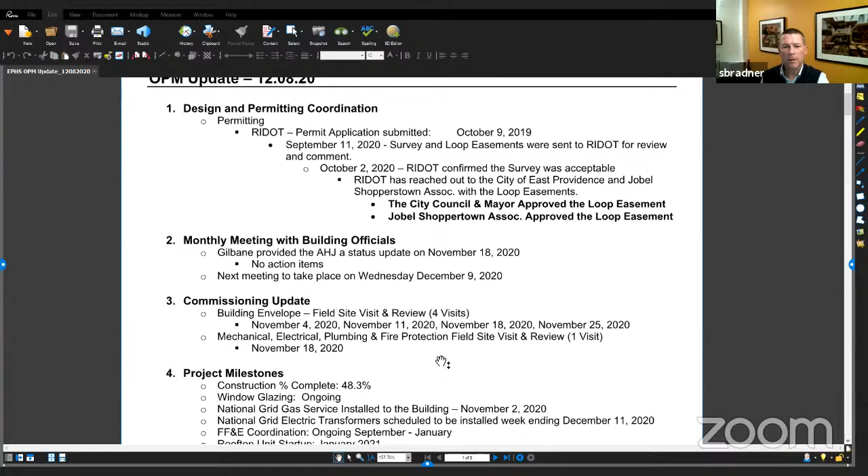Project milestones - we talked about this last month to get a better sense of the actual completion to date. This number reflects the work in place, including retainage, so we're at about 48, just over 48%. The ongoing activities: window glazing - if folks have been out there over the last week or two, they've seen an extensive amount of the curtain walls going up. Those are the much more monumental glazing going up on the corners of the stairwells. So you're really starting to see the building enclosure coming into its final form.

Key steps with National Grid: we had the gas installed just before our meeting last month, and we are installing transformers next week. That's a big deal to flip us over to permanent power. I believe what we are currently slating is by January to be ready to flip that over once National Grid has set the transformers, which is a key milestone, and then the electrician doing the final runs from those transformers into the building for those full connections. So that's a pretty big overall project milestone.

FF&E coordination—there's been a lot of activity over the last several months, and that's ongoing, including samples that have been placed in the gymnasium. We've had a lot of interactive discussions with AI3, with our furniture consultants, with members of this committee, and members of the school faculty and leadership team. It's been a pretty dynamic discussion, and I think we're honing in on that final sample set of everything we're going to need from a design standard standpoint.

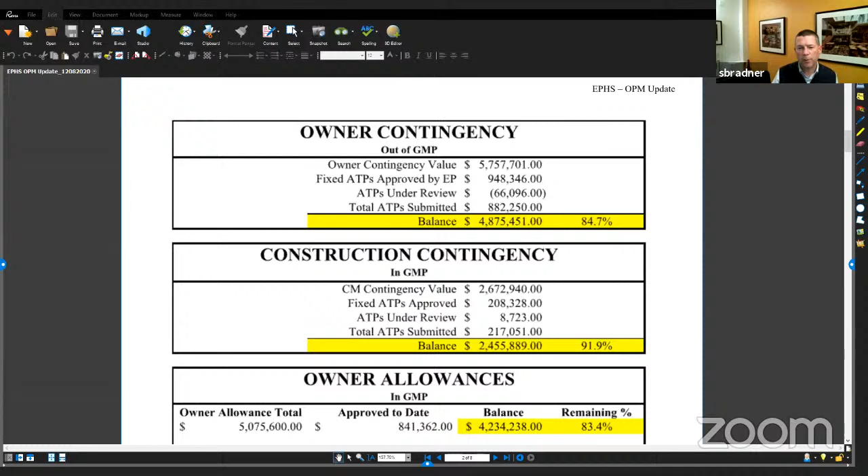From a financial standpoint—Sam, excuse me? Yep. Can I just go back to project milestones for a second? Sure, yep. With the rooftop unit startup next month, will we be getting off temporary heat in January?

I don't know that to be the case, Gene. Let me confirm that—I don't have Eric with me tonight, but I don't know if we're going to immediately flip off the temp heat. Yeah, that's a question I'd like to know—if we're going to heat part of the building with the rooftop units and part with temporary heat, or how that's going to work.

Gene, it's certainly not going to end immediately. Anything we can leverage the permanent system for, we'll want to, because it gives us better heat distribution. But I think it would be premature to expect that once we energize it, we'll be able to do a flip. And the other thing too is startup doesn't mean commissioned and completely ready to go either—there's that complete commissioning process that's going to happen with those units as well.

So if for next month's meeting we could know when we're getting off temp heat, that'd be great. Yeah, I think in the big picture, we're probably going to use it all winter. Bill, I don't know if that's a fair assumption, but I'd assume there's going to be portions of the building that will. But you can't do the millwork without some type of heat, so...

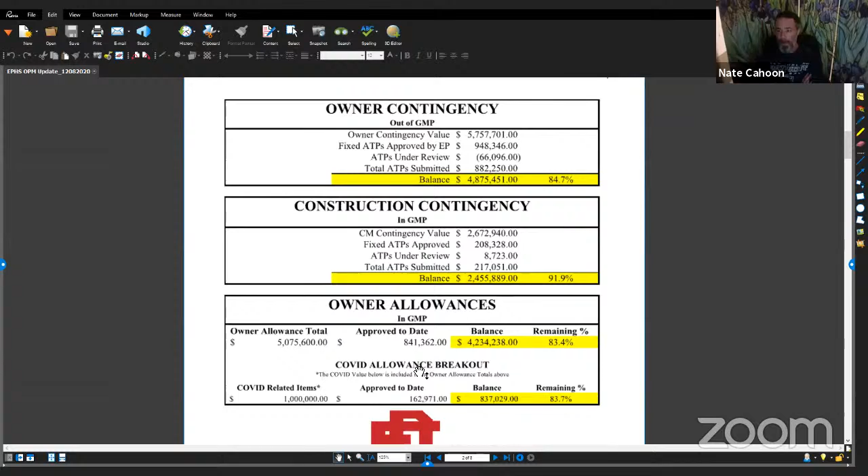Sorry Nate, I was just going to add a comment, certainly not to contradict anything Sam said. Everything he reported was completely correct.

No, not at all, but just to further your point and Kathy's point too, regarding the progression of these COVID cases: as of Friday we had 3 positives, as of today we have 7. We currently have 17 people on the project in quarantine. So to Sam's point, it's changed very rapidly, and I think we all know the trajectory we're very likely on.

And the building is getting enclosed, so I think it's putting the workforce in the building at greater risk too. But we haven't had any on-site transmission that we've been able to determine through tracing, and we are doing all of the contact tracing ourselves.

Thank you, Bill, for the further explanation.

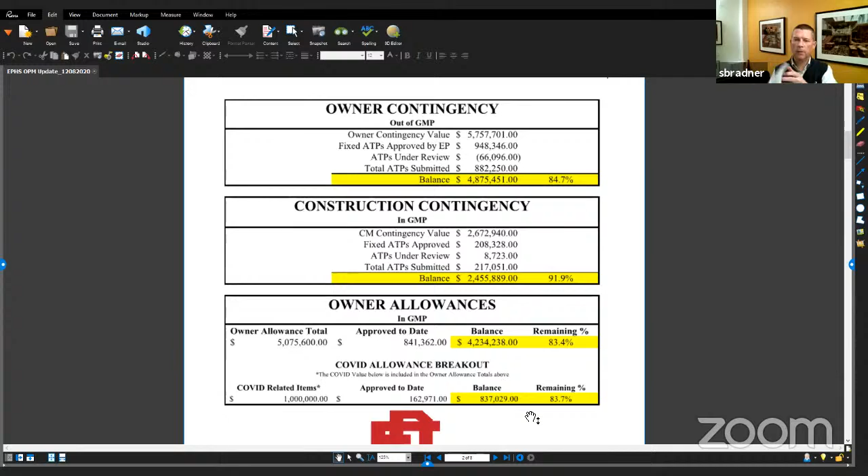Just a financial snapshot of where we stand today on contingency, construction contingency and allowance. With the projected ATPs, contingency is about another 3% drawn down since last month. We're about just under 4% of construction contingency utilization in the last month. And our owner allowances, we've used another 5.7%.

The COVID allowance breakout remains at the same number it was last month. Gilbane is continuing to track these costs, but we're not necessarily seeing a hit every month against the allowance—part of that is just timing of paperwork—but those costs continue to be put against that allowance, and we continue to review them on a regular basis with Bill and the rest of the team.

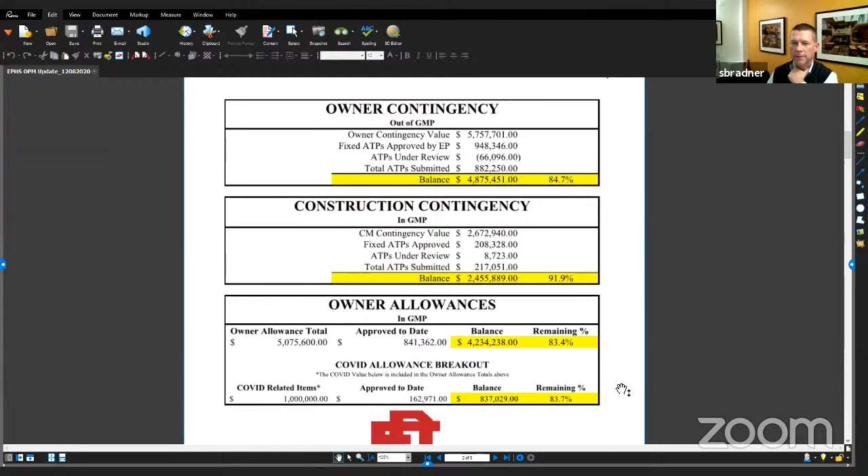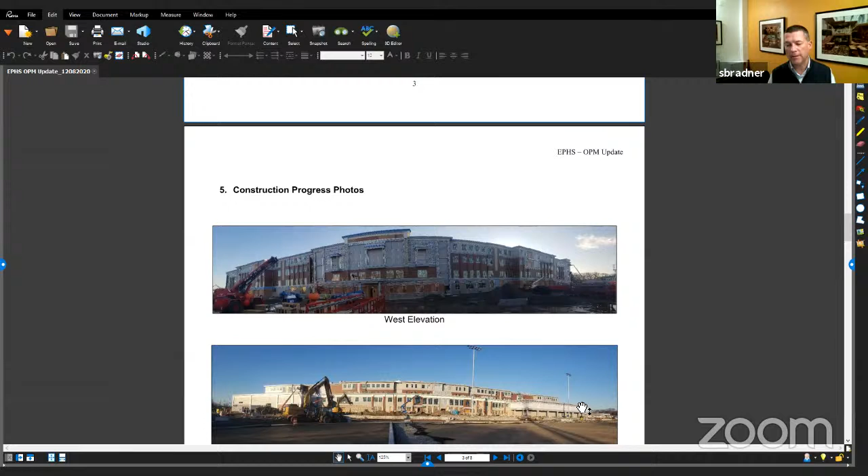The look ahead—again I'll use the pictures to talk through where we are. In November we had 17 subcontractor teams on site, 230 workers per day, and just shy of 1,850 man hours per day for that month. Similar to the last few months, we're seeing a full complement of all the trades.

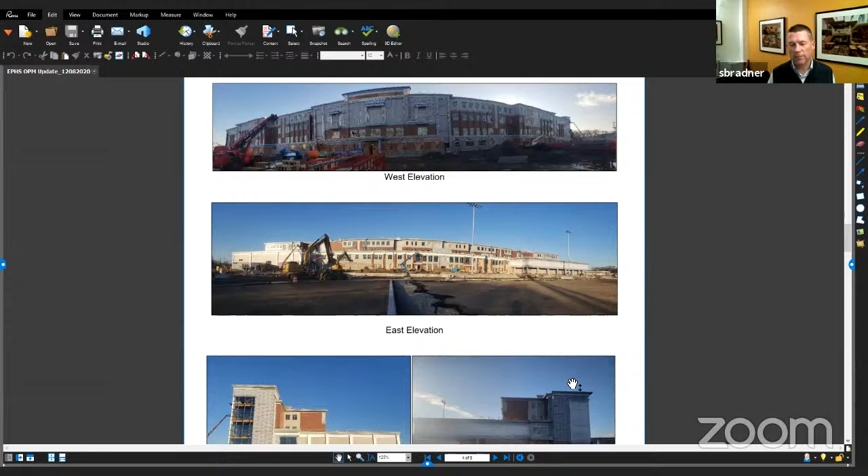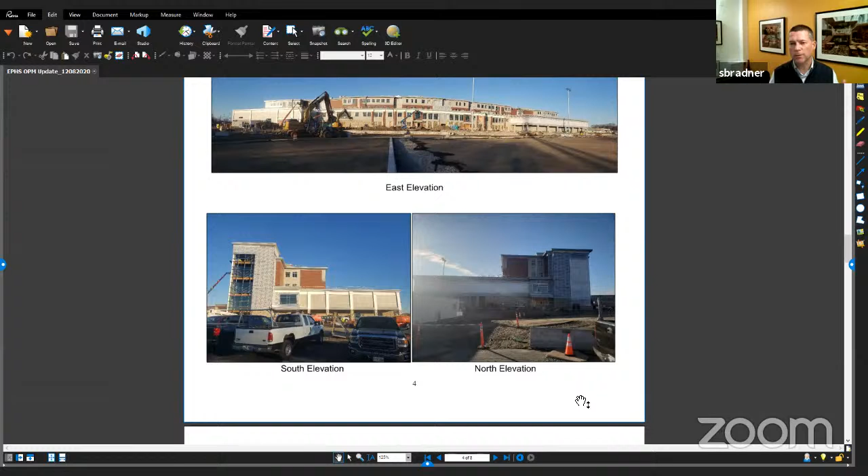From site working their way in, still ongoing major earthwork and paving. There was a significant amount of asphalt introduced to the site over the last month. They continue to work on the track at the stadium.

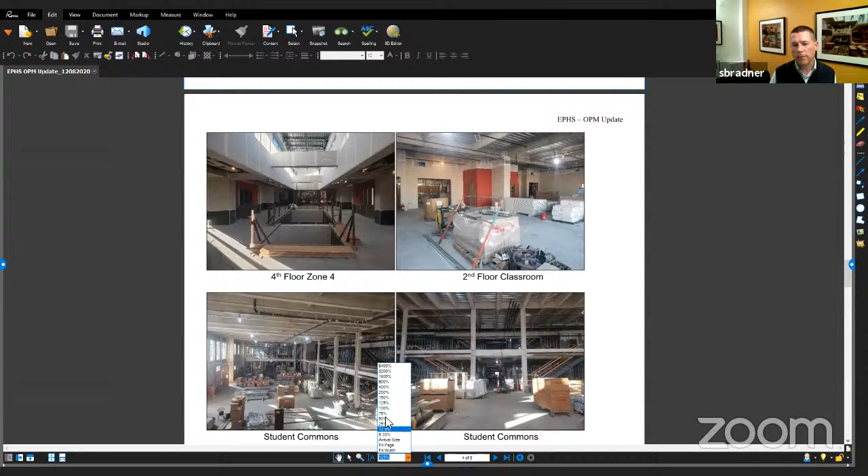As we come to the envelope, as I mentioned before, we have continuous work happening around it with installation of curtain walls. Really the windows are just about complete, and we're getting into that closing sequence of a lot of the exterior siding and envelope components.

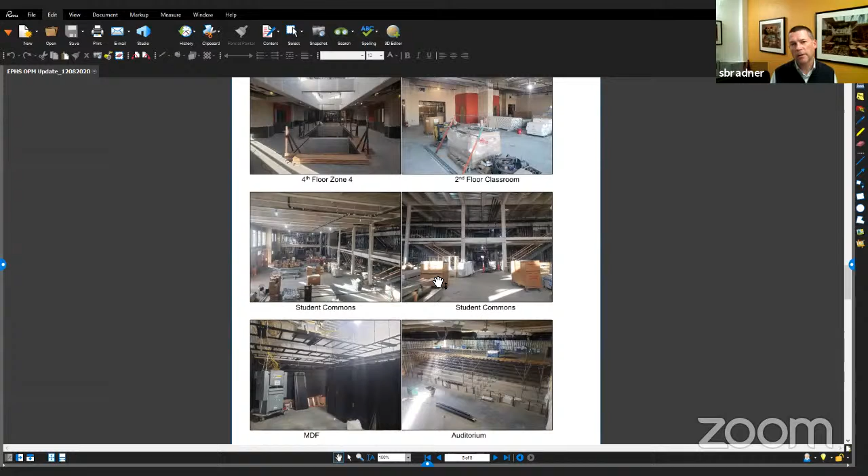Interior, we're seeing a tremendous amount of progress from south to north and top to bottom in all the classroom wings on 3 and 4. Really starting to see some of these common spaces come together—here are two photos of the student common space. Again, wide open now; this will all start to become enclosed, but it gives you a sense of the volume of that space.

Another great one is the auditorium. Although you have decking in here for some of the work happening up in the ceiling, the space and volume of that room is very apparent as you walk in there.

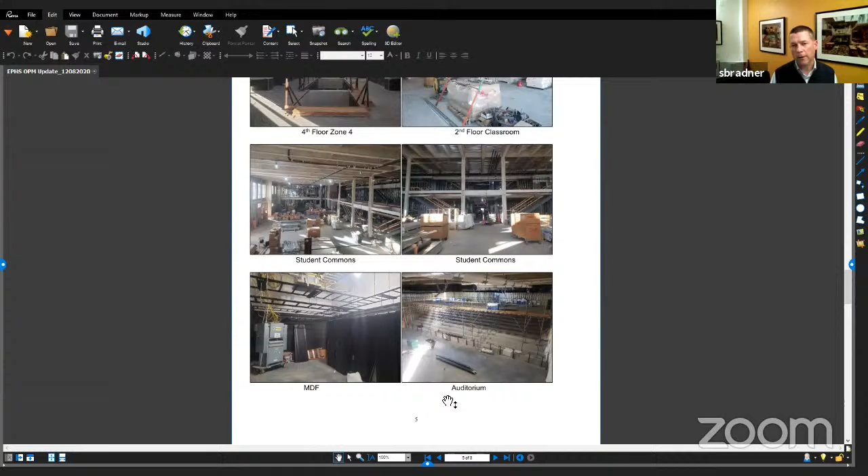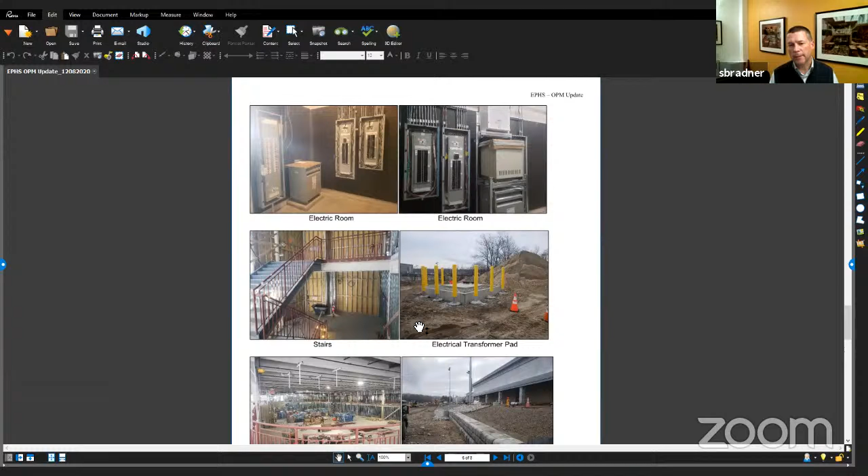Some of the less exciting but equally important stuff is the introduction of the tel data—so you have your MDF room and IDF rooms coming online. Major work on the electrical, especially in preparation for the transformers landing on site next week. Stairs, misc metal work around those stairs, and some of the open two-story spaces.

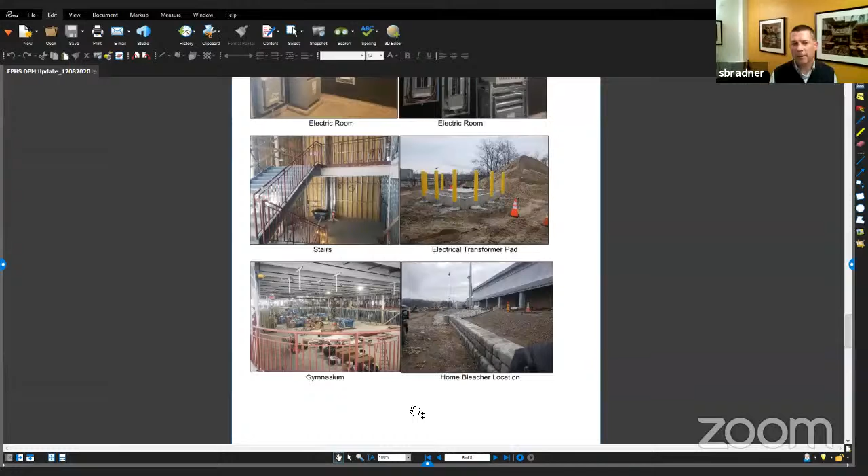And then just some of the work out on the site itself. For folks, I know we've had a couple tours over the last 2 to 3 weeks—really the space just continues to change; if you take 2 weeks off, a lot happens out there. So I continue to encourage folks to get out there when they can to really see how that space is developing and how everything's coming together.

We've got a workforce that's increasingly more vulnerable, impacted, and certainly critical to keeping us on track. Do we want to take a look at maybe cutting the tours or holding the tours at bay until we feel more comfortable where this is going?

Or you could do them at a little bit different times too, Nate, if we're trying to prevent any exposure. But that's very much up to the building committee. I don't want to promote any bad decision making by any means.

Would there be times, Sam, where, as you mentioned, it'd be less workforce out there, it'd be appropriate for tours, like getting closer to the holiday? Yeah, I think in general, Bob, after 3 or 3:30 is when we see most of the trades cleared out based on their work day and hours.

That is also, obviously, daylight's diminishing at that point. But I think that would limit or eliminate any of that kind of crossover between a tour and the trades people that are out there on a daily basis.

I haven't been out there for about a month and a half, and I'd love to get out there again, but Nate is correct, we should minimize our interaction with the trades as much as possible. So if you could let me or other people on the building committee know when a good appropriate time would be for the next tour, that'd be nice.

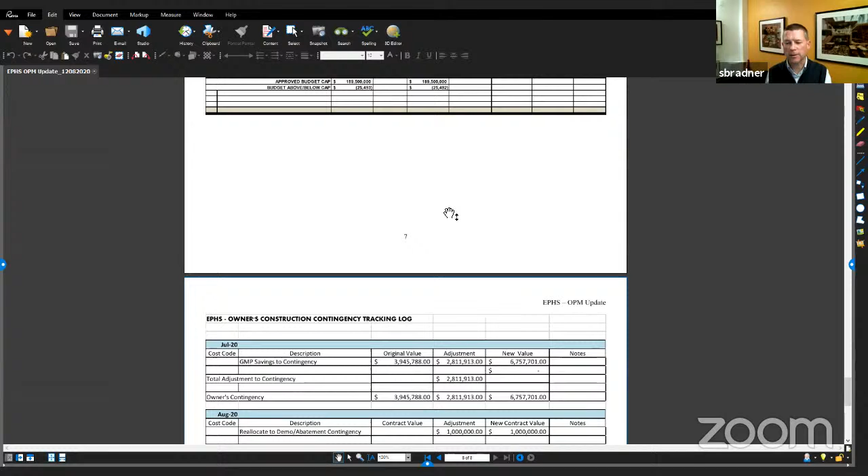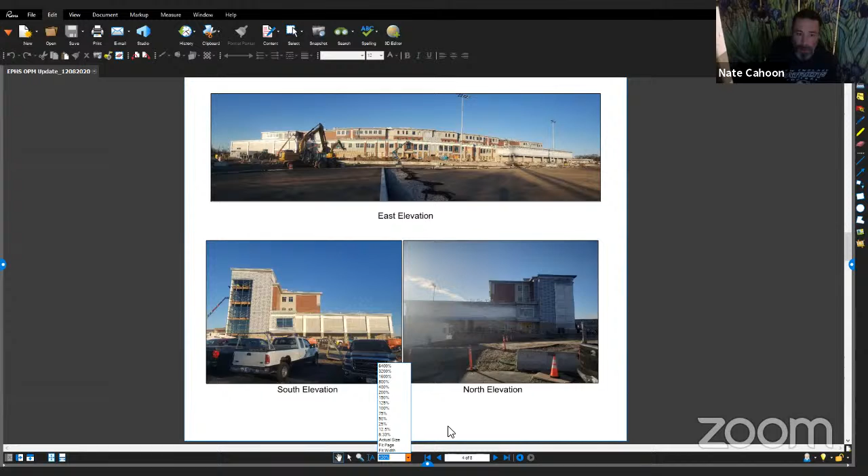So happy to answer any questions. I know Justin's waiting in the wings for the next conversation, but whatever the committee has for us, we're happy to answer. Just quickly, do we feel like we're on track? I know, Sam, you mentioned the various sessions that have been going on for FF&E. Do we feel like we're on track for the contracting portion of that enterprise, if you will?

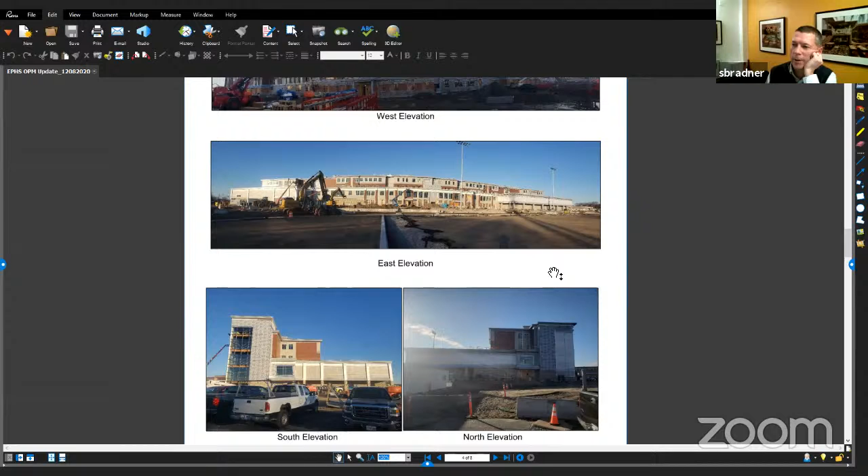Yeah, I think we're crunching a lot of work into December and January to get ready for that bid package. So, and Justin can weigh in too, I know Justin's on the call. I think we are on track. We're making some adjustments this month with some of the sample furniture that came out, so we quickly have to make that turn and get that back, and get the documents correct, make sure that we've got the right basis of design information in there so that we can get everything ready. Justin, I don't know if you have any comments on that from a schedule standpoint.

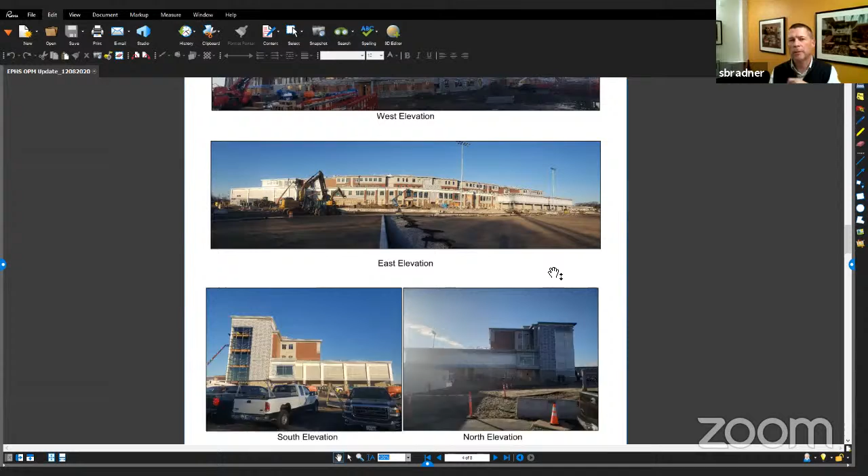As far as schedule goes, we're still on track to go out to bid roughly in January for FF&E, and that will give us an install date of July or August, basically before students are in. So we're still on track for schedule, and we're just wrapping up the loose ends.

Do we have any information, Justin or Sam or Bill or anybody, about limitations on materials and availability of certain types of items? I imagine that's probably going to be a decision point for us when it becomes time to award that bid, just because we think something is the ideal thing for the building. If it's delayed by 6, 7, 8 months or something, then we might have to shift gears.

We actually had this conversation quite a while ago with our consultants for both furniture and equipment, and they have seen an uptick in time, but not significantly. And that uptick is actually included in that schedule. So we do have a little bit of a buffer in there for COVID, or any of those delays. As long as we don't get surprised by any of it, we should be good, but there is a little bit of buffer in there.

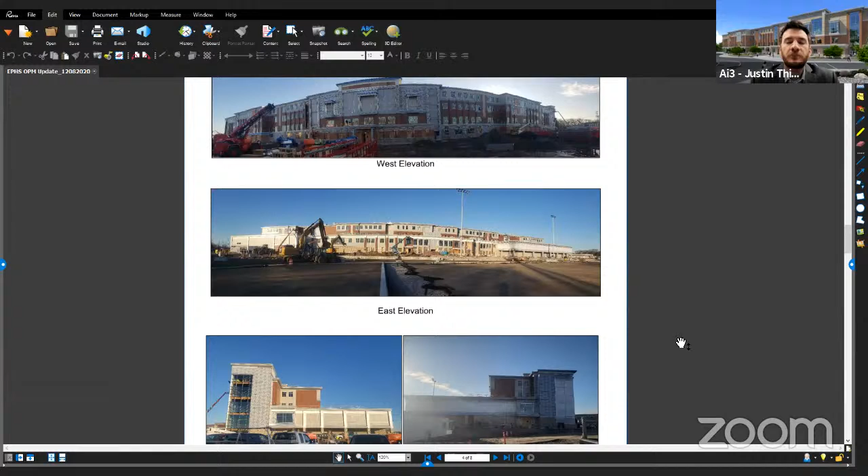Jim mentioned it when we talked about FF&E several months ago, 4 or 5 months ago. I just want us to continue to keep an eye on it, because it'd be a shame for everything else to fall into place, but for this not to be put into place. And that's the thing that kills us, if you know what I mean.

Understood. Nate, on the construction side, we've had the good fortune of not experiencing any significant issues other than what we incurred in the very beginning. So I'm cautiously optimistic that we've got pretty good control of everything right now. We certainly are not aware of issues. I would be more concerned about materials that aren't yet fabricated and what the consequences may be.

Of events over December, January, and how that might impact manufacturing down the line. That's what's going to have to be monitored.

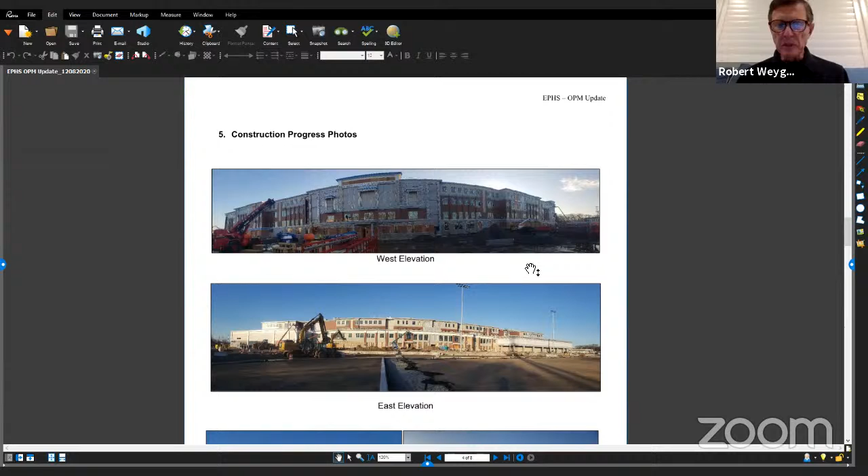Justin, I had another question about the FF&E, if I could. Nate raises a great question. By that January meeting—I'm not sure what the date is—would we be able to get a sense from you of anything that may have changed, whether that buffer zone may be used up a little bit, or whether it's on target? In other words, just give us a status update in our January meeting of where you are with FF&E.

Yeah, we can definitely do that. I just made note of it. I'm in constant contact with our consultants, and I will make it a point tomorrow to touch base and see if they've heard anything new regarding delays or anything like that. But we can definitely give you an update in the January meeting.

Thank you. Yep. And Nate, back to one of your original questions, I think the other thing will be that schedule will be part of the bid that goes out on the street. So let's just say there was a specific type of chair we were looking for, but the vendor came back and said it's a 16-week fab and then another 10 weeks to deliver. Then we're going to be able to have that analysis, and when Justin and the team do their bid leveling, they'll be able to take that into consideration.

And that may be a pivot point where we say, okay, this is what we wanted to do, but there's an 'or equal' that we're willing to go with that doesn't have time constraints. Does the ownership team want to do that? So that'll be part of that dynamic evaluation of the bids as well.

Okay, I guess last question on this, not to beat this to death, but just encourage everybody to cast a wide enough net on there. Maybe reach out to sources you wouldn't always be inclined to solicit, just because there might be somebody out there with some magic dust that can pull off something that one of your typicals can't.

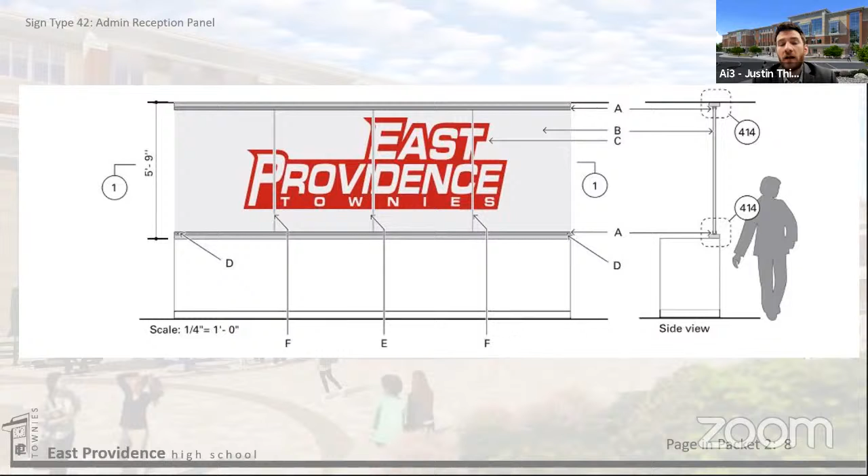Moving into the main focal point of the building, this is a handful of signs right outside Student Commons. It's right at the main intersection of the main entry and the main corridor. So this is visible for all the students, visible for all the public who enter. It's the center hub of the building.

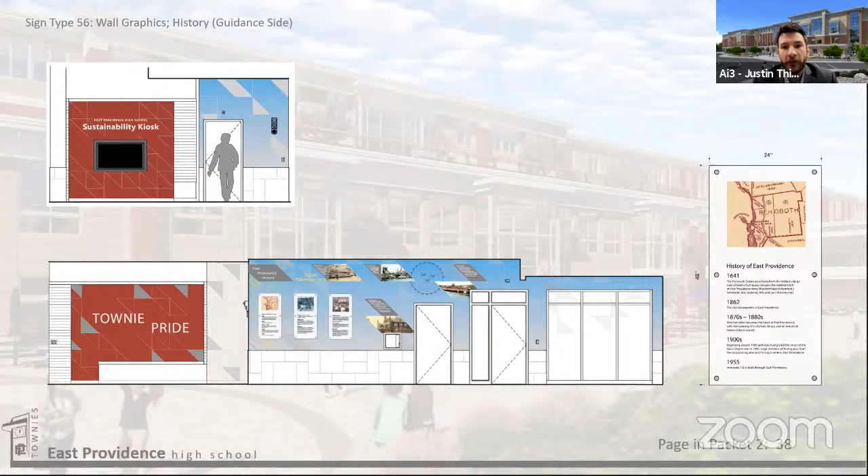Following around the corner, it turns blue, and on the bottom part where it's a little longer, this is the first part of the history aspect of the project. There's two of these. This first one is of the city, with some facts about the city, and the triangles are the unifying element throughout. There's also images of town, some dates, and important facts of the city.

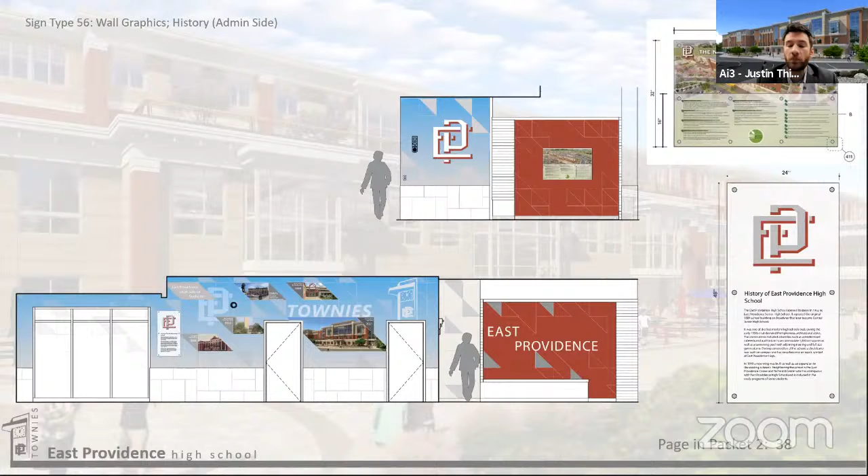This is a 3D element, and you can see how they sort of wrap on both sides, through the main corridor right in front that's out to the main entry. So as you can imagine, people walking through are flanked on each side with your Townie red, the sustainable elements, and then they can transition to the history items within the building.

Throughout the project, we have inspirational quotes and words, as well as East Providence logos. For instance, the one on the left, the EP, that one is actually on the main level between the student commons and the athletic wing. So if there were any occupants walking back and forth, whether students or public, they would be able to see this.

And then there's some other instances for graphics and text throughout. For instance, this one: be strong, be brave, be humble, and strive for greatness. These are located throughout the building.

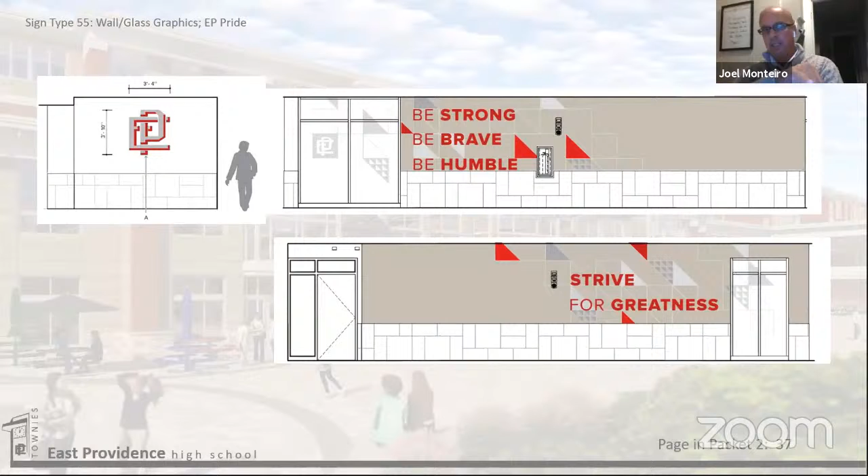On that one, wasn't that the one we spoke about, that we learned that the EP is more three-dimensional? Yes, correct. Most of these are vinyl graphics, like be strong, be brave, be humble - it's printed and then rolled out and adhered to the wall. The EP is actually a 3D graphic. Think of it as a thick acrylic that's back painted and then mounted to the wall. So there is a 3D element to it, and it's not just vinyl cut around the logo. So yes, that is correct.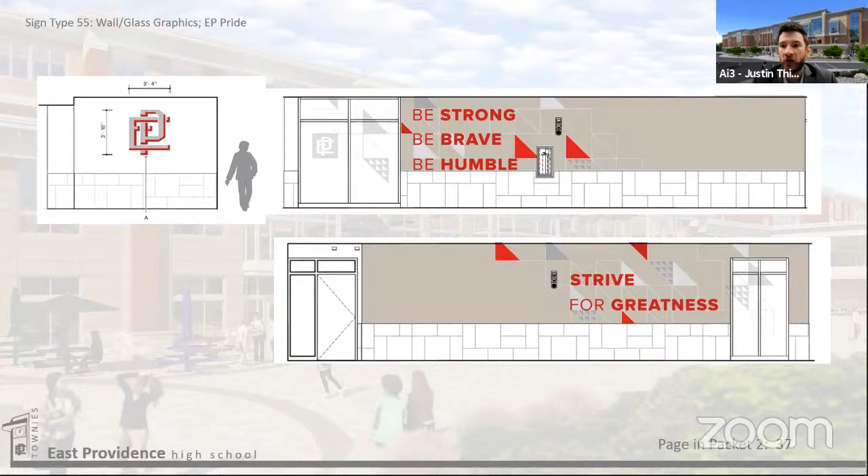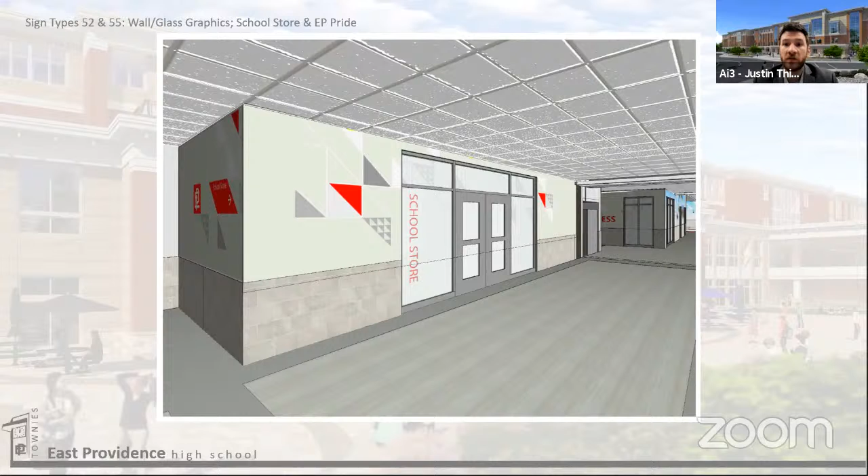Just another example of the triangle wayfinding element here, noting school store and how it applies to the glass as well. You can see it in action here, how it transitions around a corner, really creates movement and excitement, as well as the wayfinding opportunity for this sign.

Here's an example of the metal letters within the building. Spaces that are identified as dedicated have these letters - they're adhered to either glass or to the wall. For instance, Media Center and the band room are on glass. The auditorium is on the wall directly above the doors.

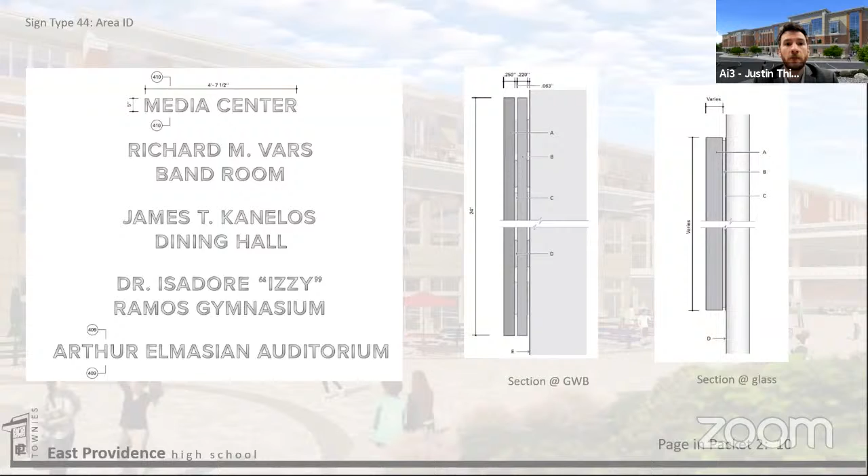This is an example of the student commons. Student commons is a really large space, so we were looking for ways to make it lively and also provide some inspirational words. We find these large inspirational words very helpful, and we've had really good positive reviews with this stuff - it creates a sense of community within it. So here in Student Commons it's collaborate, innovate, respect, and connect. And you can see how the towny red, as well as the tones of gray, are tied in.

Additionally, we have recycle stations throughout.

I mentioned the CHPS requirements for the green kiosk. We also have recycle station requirements. To highlight these, every recycle station has graphic signage over it to promote recycling, reduce waste in the landfill, and push that concept forward.

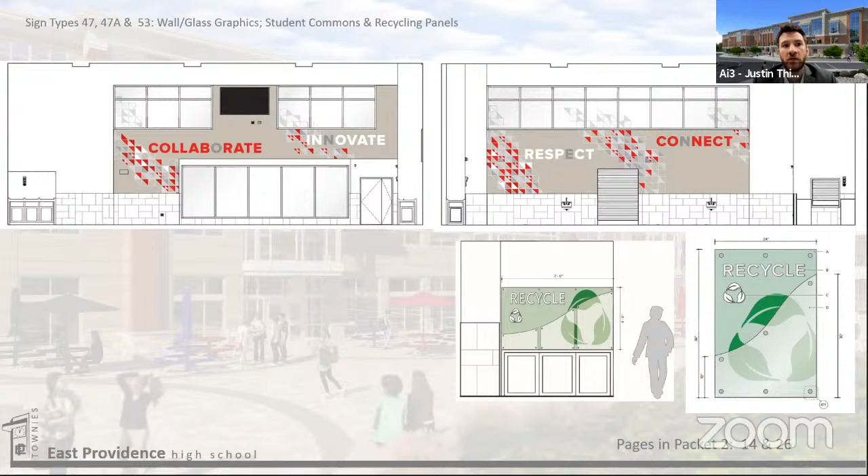Hey Justin, are you comfortable enough to say that wherever there's graphics in red, it's towny red? Yes. And some of the images like this one show it right on the screen. Obviously it's the computer rendering, so it's slightly off, but it will all be towny red.

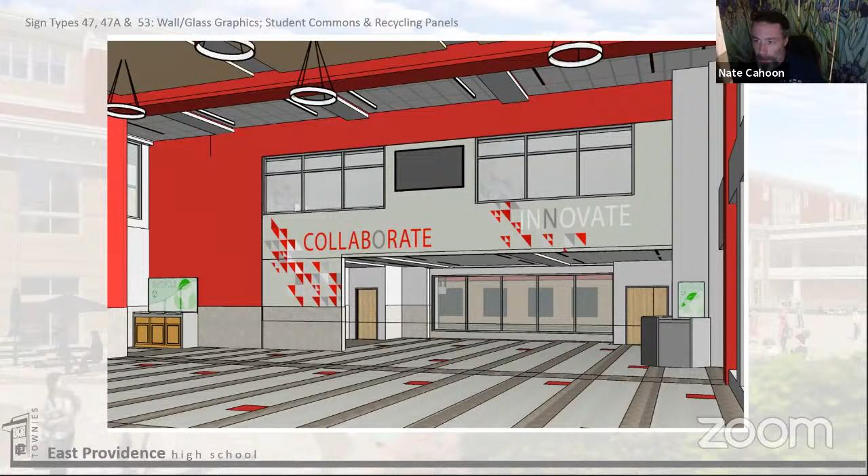I think that's what everyone prefers, but the issue we've had with towny red in the past is it eventually fades into a chewed bubblegum pinkish gray. What are we looking at here in terms of longevity?

These are all high quality paints, and it's also high quality printing on the vinyl. The fade on these is minimal. Additionally, if there's any direct glare, daylighting is actually a huge part of CHPS, so there are ways of reducing direct glare and daylighting, which is the cause of fading to bubblegum pink. So the building itself should address most of the fading concerns.

If you look at the exposed steel on the addition at the high school, that faded into LaSalle maroon. I just don't want that to happen again. Makes sense. On the exterior, it's primarily aluminum letters.

Even some of the vinyl at the walking track, the Big East Providence sign, that's actually a gray or white. I can't remember exactly, but it's not towny red, so it won't have a chance of fading.

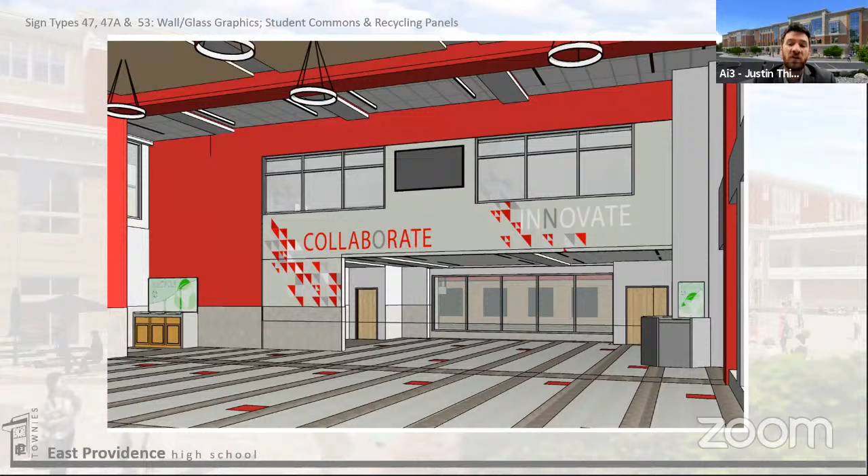We also have some signs that are program specific. For instance, we have engineering and visual arts right here, located in the center of the building, basically right behind the space. You'll actually see these walking down the hall, visible at the end of the hall, drawing excitement and wonderment, making people want to see what's down there. Engineering is represented more technically with mathematical straight lines, while visual art is more organic and free-form graphics. These are both on the second floor.

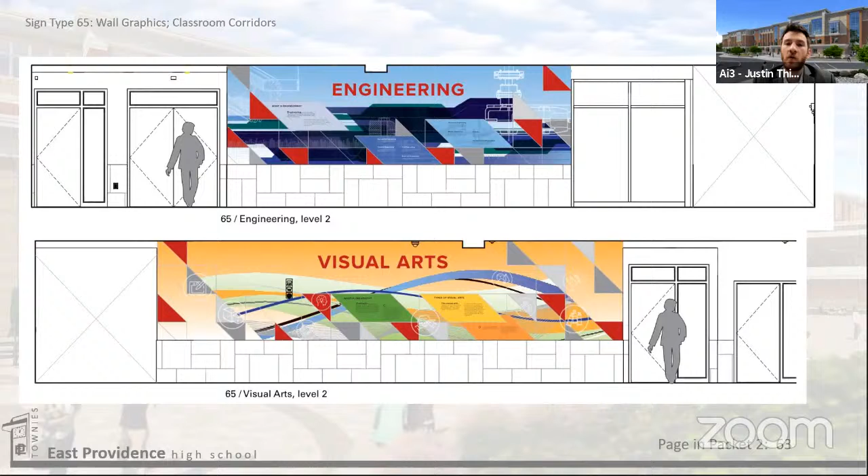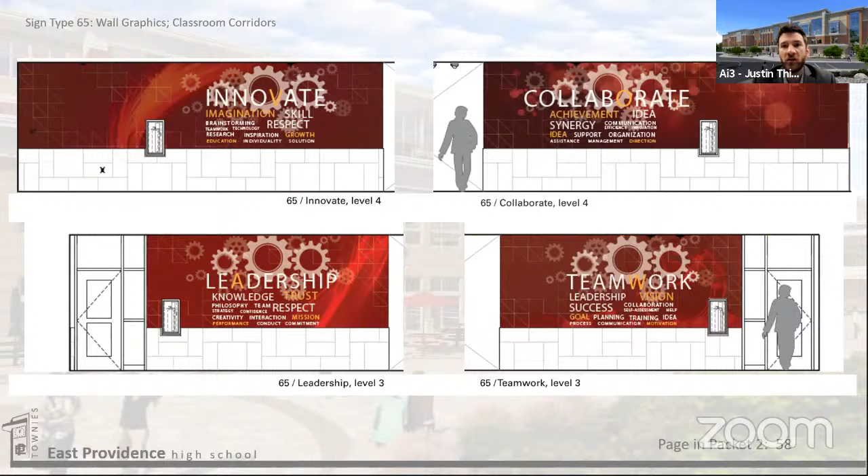In the same locations on the third and fourth floor, we still have the same corridors, but instead of highlighting engineering and visual arts, since those are only on the second floor, we established four words: innovate, collaborate, teamwork, and leadership, using those for the signage elements here, including how they wrap around the corner. So as you're walking down the hall, you'll see the words, you'll see the red, and it will draw you in, then turn the corner to promote movement throughout the building.

And that's kind of what I was leading to. See that red as compared to the stripe on the ground? Is that more of a maroon or a red? That background red, let me check on that. The way we have to put these in the model is a little bit different, so let me check to make sure.

Here are some additional CHPS signs. Justin, can you go back to the previous signage? One of the things I had a question about was longevity, wear and tear by students. Those outside corners you see there, I'm not talking about the vinyl. What is the outside corner material and how will it protect the various artwork and vinyl pieces?

Rubbing against it, hitting it, whacking it. So the vinyl is actually pretty thick and very durable. One thing we do here is we don't wrap the vinyl around the corner. The left side, being a solid color, would actually be paint. The side with teamwork, leadership, vision, where the text is, that would be the vinyl. We'd have them hold the edge of the vinyl off the corner by a quarter to half an inch, so you don't have that little lip sticking out that can get caught, because that's a big concern with backpacks or people brushing up against it. Once it starts peeling, they'll just rip the whole thing off.

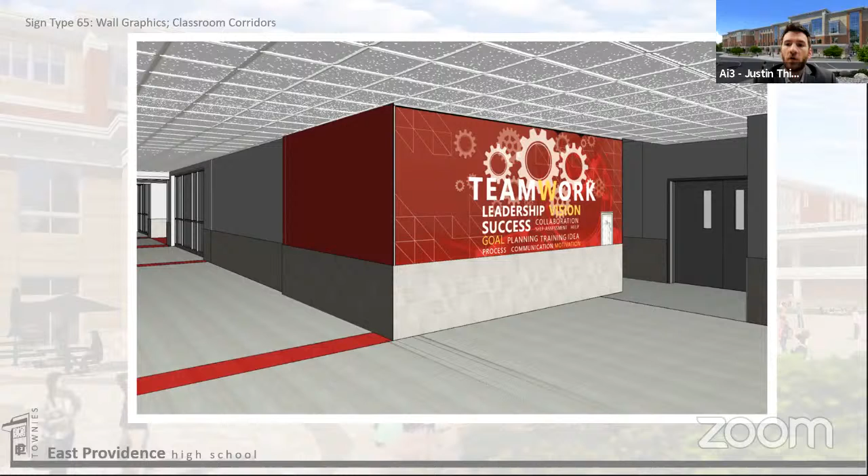The corner bead here is a metal corner bead, just skimmed over smooth with the drywall, so there is metal behind it. But I'm talking more of an outside edge. How does the vinyl sit into it, right, Gene? That's what you're talking about. Something to think about, better do it soon though.

Moving on, some more green signage. All of the toilet cores have water conservation signs throughout the core of the building: electric hand dryers, low flow fixtures, battery operated valves. These are throughout, and this is another CHPS requirement.

Throughout, we have 4 clusters of science labs, 2 on the 3rd floor and 2 on the 4th floor. They're pretty much the same with a few exceptions to allow for flexibility for programming and for what specific science purpose a room is used for. Because of that, we didn't want to put any text on these labeling it chemistry or biology, but wanted to provide graphics to imply it without locking in the actual trade.

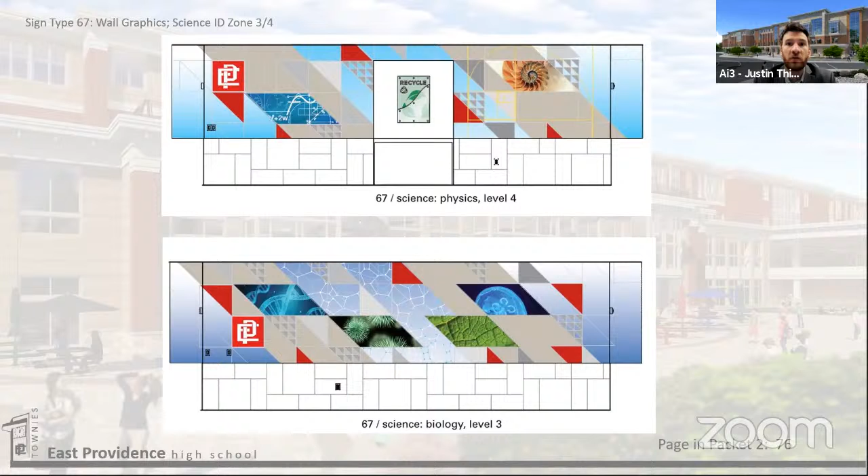Here's an example of them implemented. The image on the left shows the door, and there's a little alcove to the left - those are 2 entries to the science classrooms, so you'll see how it embeds within that area. On the right, additional recycle signs are embedded in some of these science graphics as well.

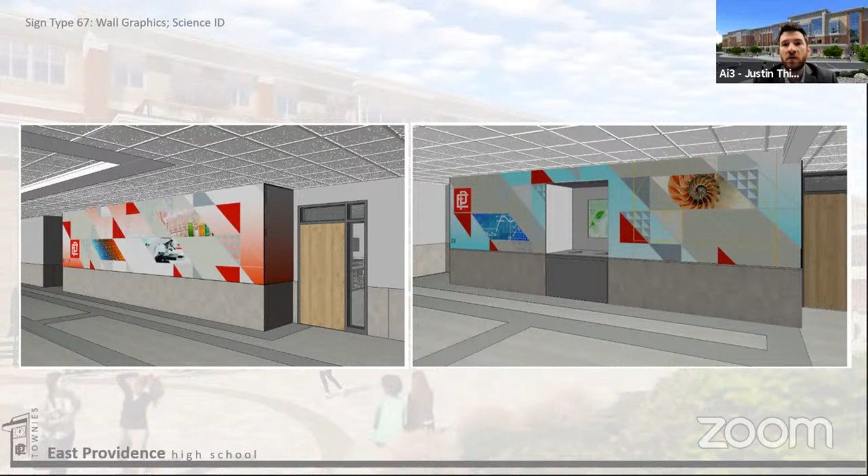Moving to the exterior for a couple sign pieces. Here's the exterior banners. They're at the end of the building, both the north and the south, by stair 1 and stair 4, drawing attention to the Performing Arts Wing entrance and the Athletic Center wing entrance as well.

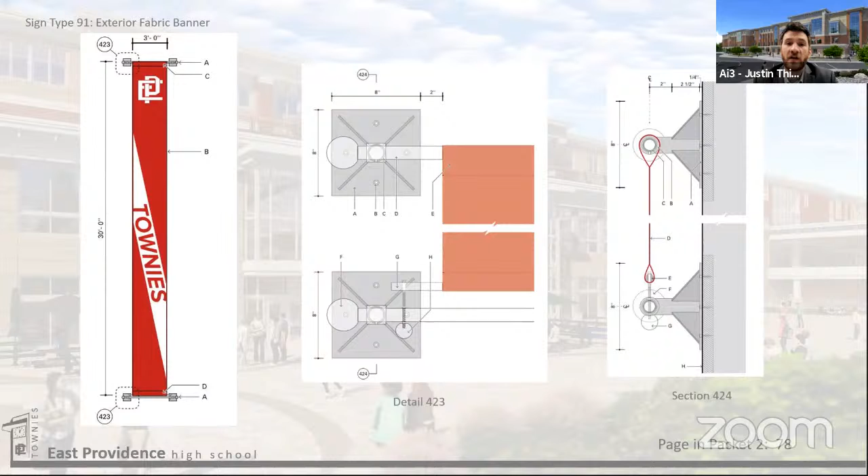Here's the exterior lettering I mentioned previously, at the walking track around the gymnasium. We have almost 6-foot-high letters, East Providence High School and Townies, in vinyl on the glass. It's on the number 2 surface, so it's protected, but this is large scale and visible from the stadium. This will be really, really cool and really powerful.

The bleachers will be in front of this, and this will be visible above the bleacher, so this is what you'll see from the stadium. Here's just a view of the end of the building - you can see the large East Providence lettering on the walking track, and then the banner caps off the end of the building by stair 1 in this instance.

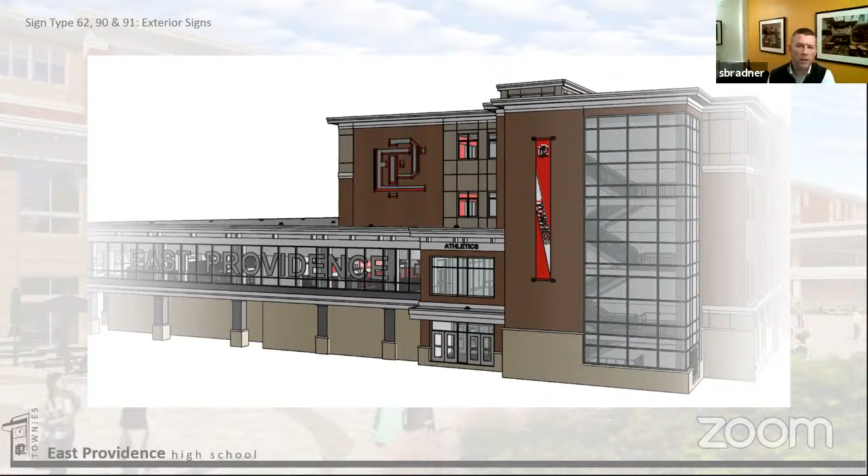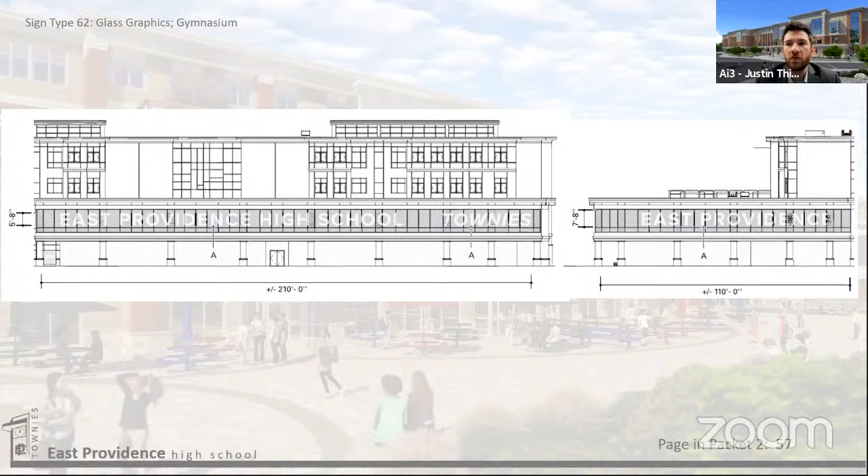Are the letters on the glass, East Providence and Townies, in gray or in red? I will have to check, but it's either white or gray. It's not in red, that way we don't have the potential for fading.

Because it's on the interior of the glass, between layers of glass, there's really no chance to change it out if it does fade to pink, which is what we wanted to avoid. So it's either white or gray.

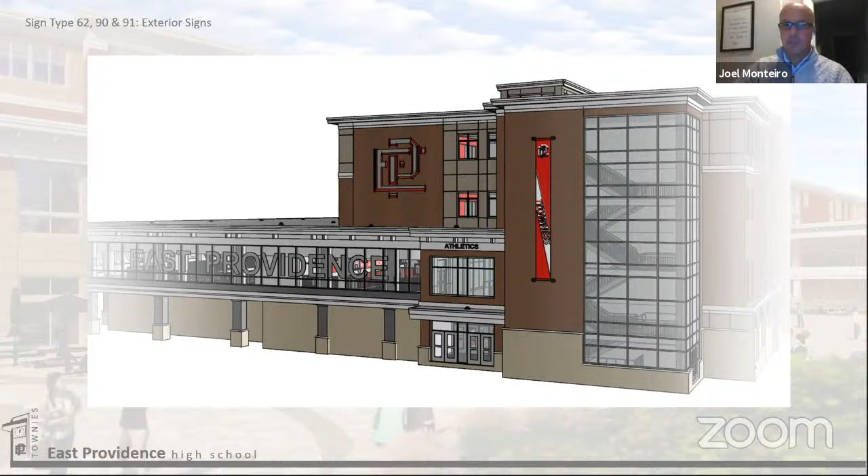Gene asked to go back one slide, questioning if the spacing between 'school' and 'townies' is intentional. Yes, it's to emphasize townies on the end, though it does have a different spacing than the other words.

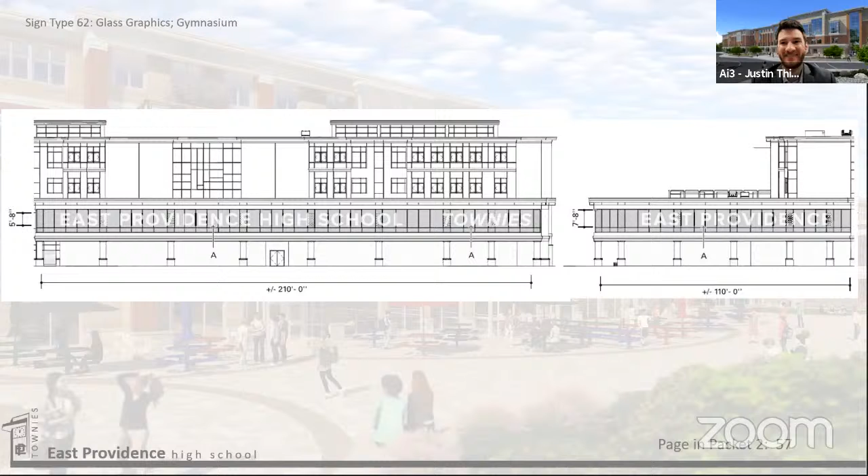My suggestion is that gray would really fade away, while white lettering would stand out nicely for opponents on the field of play, since visitors are looking right at this. I want it to really pop off the page, and white letters would help do that. We could also add some flashing lights on the letters.

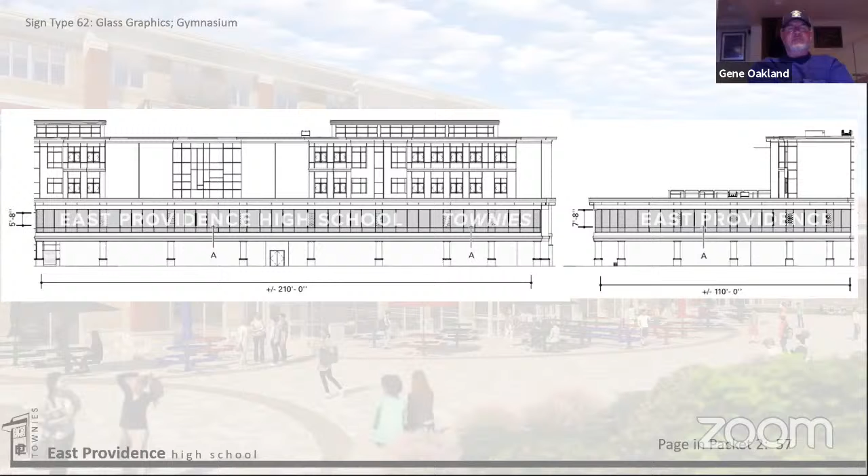I have a question, you may be covering it. Do we have a symbol on the center of the football field turf? That's in the landscape scope, not in this presentation. I imagine there is one, but I'd have to check with Eric tomorrow. We can check, Gene, but I'm assuming you'll have the emblem stitched right into the turf. That's what I'm hoping. Yeah, there typically is something there.

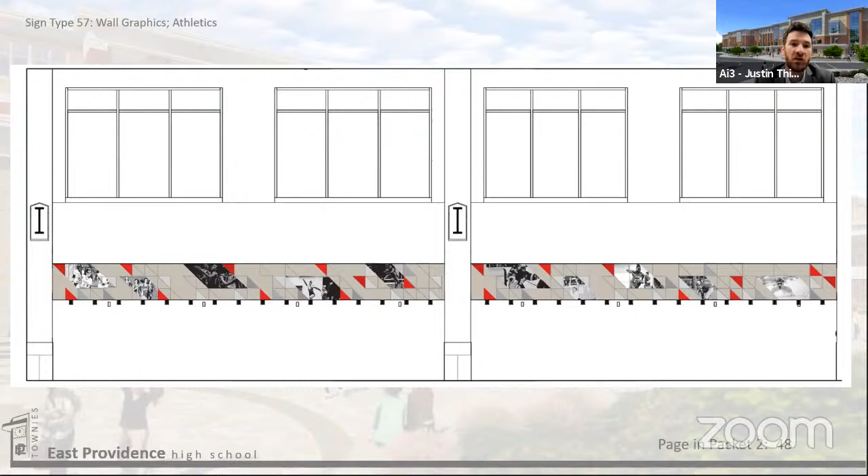This is on the opposite side of the locker room walls, flanking the athletic lobby, above the laptop charging stations. That's why you see about a 7 to 8-foot white blank space, where all the laptop charging stations will go, centrally located in the athletic lobby. Above that is a 3-foot high band of additional signage to further emphasize this is the athletic wing, showing additional East Providence athletes within the triangle scheme, with punches of Townie Red throughout.

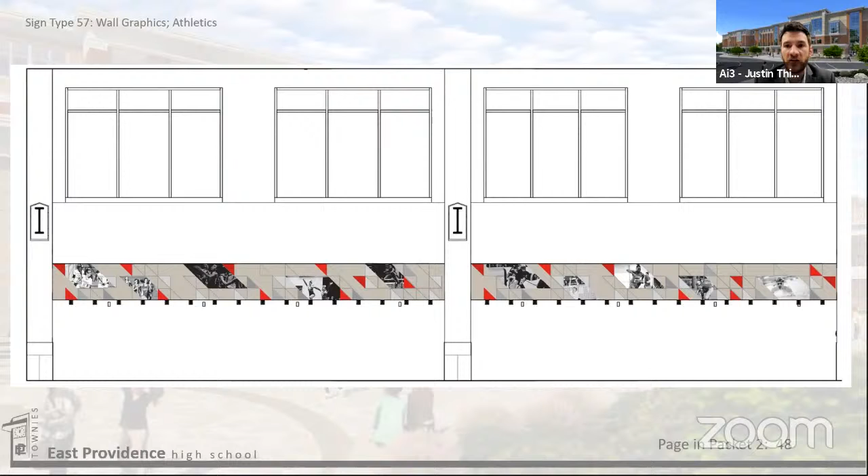Just a quick question about the photos of individual athletes: are those just stock footage, or actual EP kids from the past? Those are actual EP kids. We reached out to your local photographer, who sent us a slew of images to pick from, so we have most, if not all, sports represented, both male and female, mixing it up throughout. Those are actual East Providence athletes.

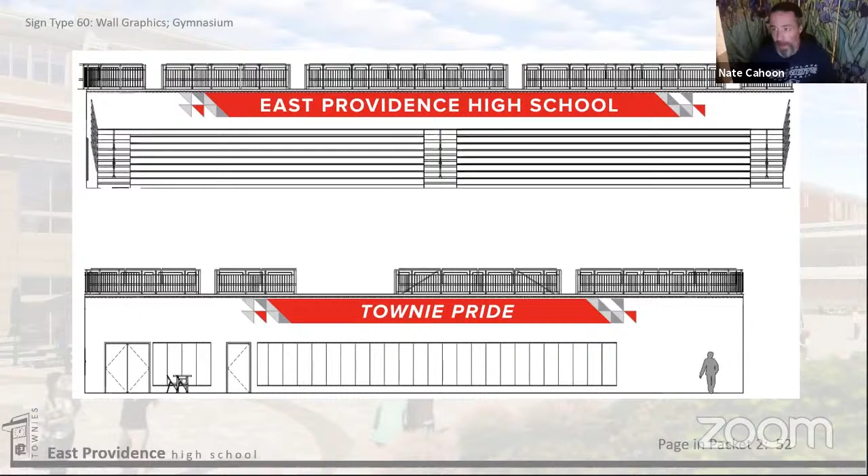Do we have a good cross section of diversity that reflects the school's representation? Yes, that's one thing we were also looking for when selecting the images, the diverse population throughout, as well as age, going back years into the high school.

So it's just not contemporary over the last 5 years. It was back further, or what? So these are probably within the last 5 or 10 years. I would have to check. As far as obtaining high quality photos, it gets a little bit more difficult going further back because these are going to be blown up significantly. But that is something I could reach out to my contact and see how old they go back, to see if we have any older versions.

It would be great because there's been some great athletes from EP High School throughout the years, and just the last 5 years wouldn't be representative of the high quality athletic ability that our students have had. Right, yep, that's a good idea.

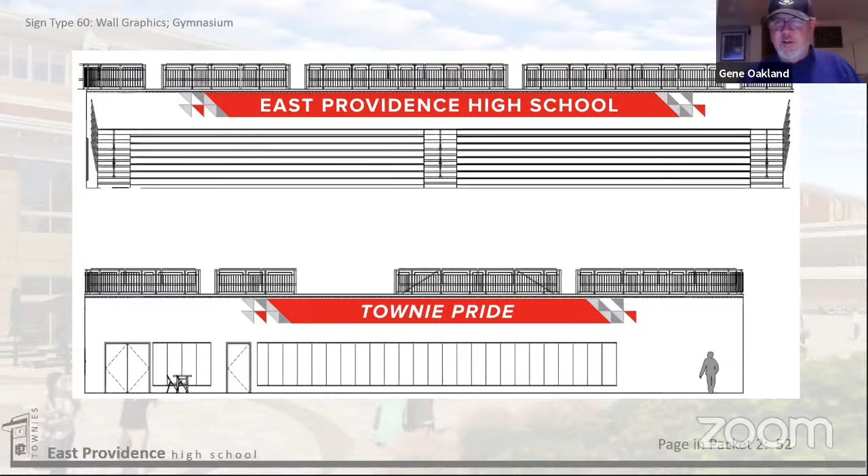Like a real dumb question, but I like to think out of the box sometimes. Since we're going to be displaying minors, is there any concern about displaying these minors in a public building without their consent? Yeah, we actually had talked about that at the meeting, and we'll discuss it tomorrow morning to see the step forward, if there are waivers and or if there are any individuals that should not be on the wall for whatever reason. But we can discuss that tomorrow morning.

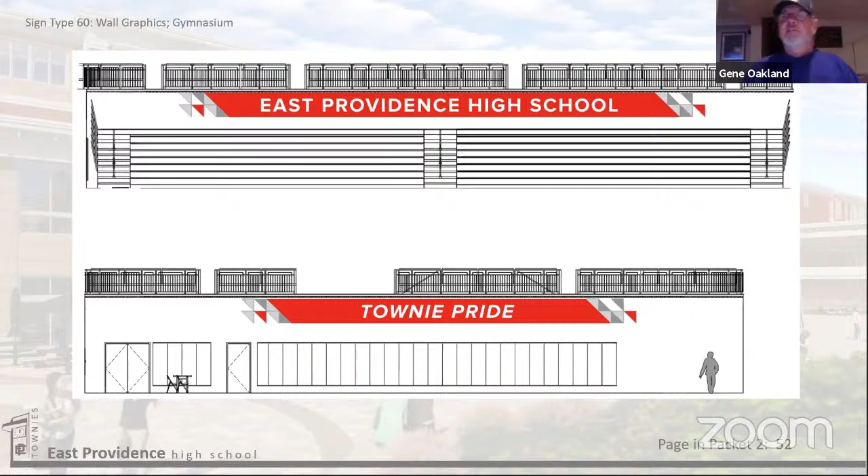Maybe they're in jail now. Exactly, and we were looking for a little bit of a review to see if that was the case on these, and we could swap them out. So that's always the difficulty in trying to pick, you just don't know what you're getting into. It's very difficult. Right.

What we did here, I'm sure you guys remember clearly, the gymnasium ceiling in this project is actually flat, and we wanted to keep it as clean as possible. We didn't want to see any of the stuff you typically see, and that became a challenge with banners. Typically you have banners hanging from the rafters, literally the rafters or between the rafters, or the ducts, or around the ducts or cables. Because the ceiling is flat and we wanted to keep it that way, these are the banners that we're actually locating around the perimeter of the gym rather than hanging from the ceiling.

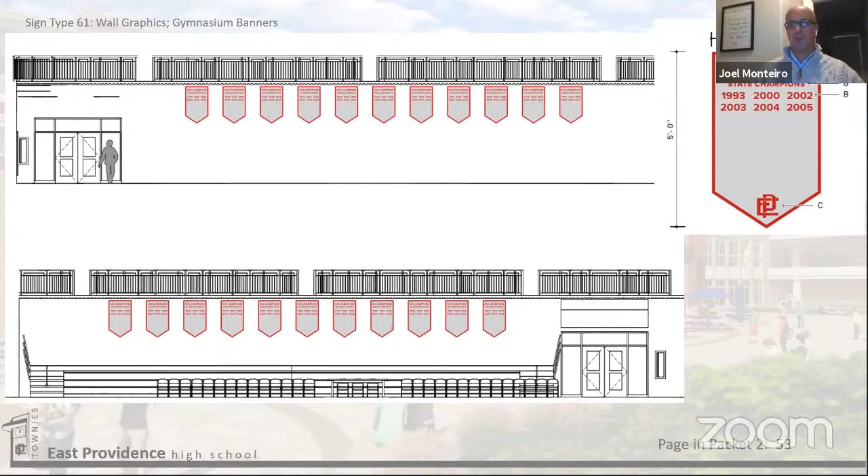Justin, that's basically on the hallway, on the, I guess, the west facing side, right? Yeah, because the other side, the bleachers would be too tall, and I know there's another logo there. But my second question is, are we, from a cost standpoint and so forth, duplicating? I like the banners, it's kind of traditional with what we have now, and a newer, cleaner, nice clean layout.

What's the purpose of having those triangular plaques out in the hall? So the triangle plaques are to highlight some of the sports. Obviously you have quite a few banners, some around 35, 40 banners. We wanted to highlight some of them in the hall, so we selected 3 from each, the men's and the women's, to highlight those sports. So that was the intent. We could remove them if you felt so inclined, but it highlighted some sports, and also added some depth to it because they were on standoffs off the wall, to sort of enliven that space a little bit.

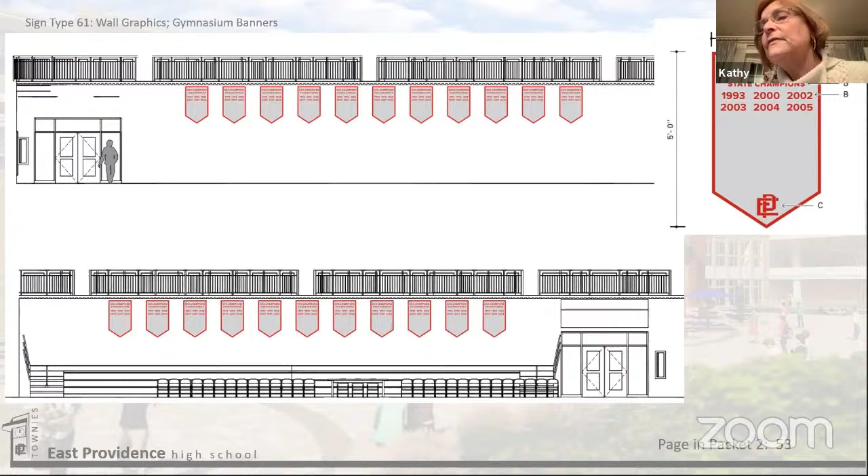I actually like the pictures of the students out there with the sports. Yeah, I think not just the picture, it personalizes it. I do think it personalizes it a little bit. And if I remember in our presentation, they said those could be changed too. Am I correct? Yes.

That trapezoidal piece is vinyl letters on plexi, so you can add years to it. If you decide you want to switch it out in the future, instead of girls volleyball you wanted boys baseball, you could have a plaque made up, keeping the boys side and the girls side. We're talking about that top right trapezoidal plaque that has the sport and the years, basically the same information as a banner that would be inside.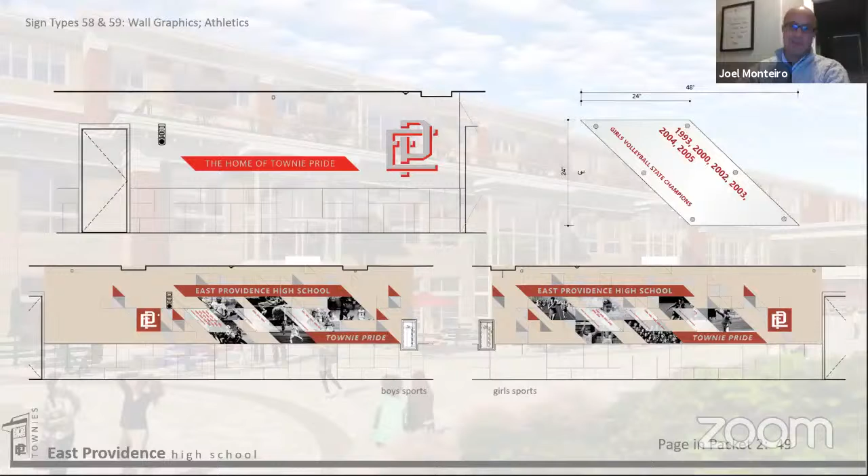I'm sorry, I thought we were talking about removing, not liking the pictures. No, I'm just asking the question. If you're talking about six, I would imagine it's not a substantial cost.

This probably speaks to a bigger thing we're going to have to think about through the school committee and administration, in terms of policy for updates, for when new banners become available that are no longer the size and shape of what we have up there, and we've run out of space. What can go on the walls, what can change over time, might need to be codified in a school department policy. You can't just have anyone sticking something up there because they think it looks good. It has to be consistent with the overall design, since a lot of thought went into how this building looked and was branded.

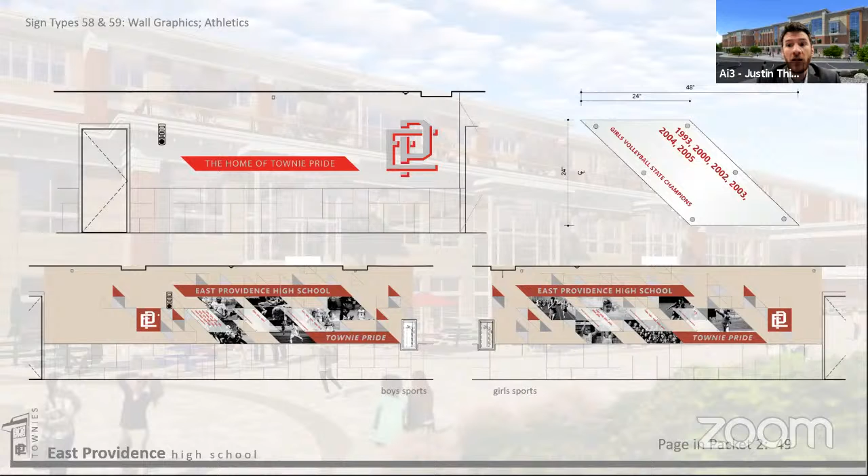That's one of the reasons we wanted to get away from traditional banners hanging from the ceiling, particularly with fading, especially on fabric. Using this method allows for future expansion, and when they reprint, they can match the colors a lot easier than matching fabrics that have faded over time. We see banners of all different colors even though they're supposed to be the same green, red, or blue. What we're providing here is a way to match in the future, so if you add a sport ten years from now, the banner can look like it was installed from day one.

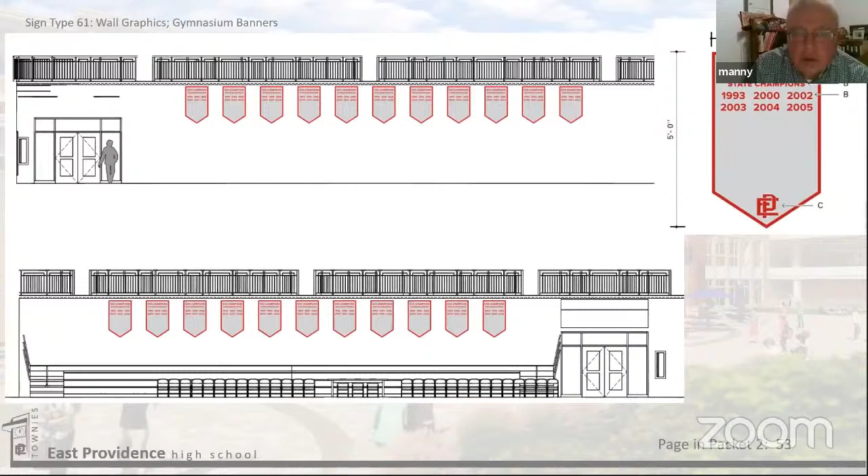Justin, how are those affixed to the wall—are they glued? Yeah, these are vinyl with a heavy duty adhesive on the back, essentially glued to the wall.

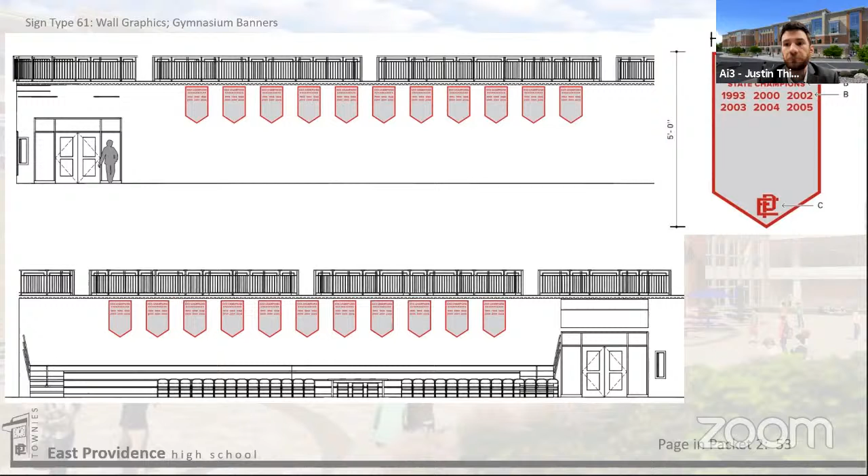Tell me why we can't hang those again. These are vinyl on the wall. If we hung them, they'd need to be fabric, and they'd only go around the perimeter, which would start encroaching on the max height needed for volleyball and basketball. We wanted to keep the ceiling as clean as possible to give the max height for the sports. Okay, fair enough.

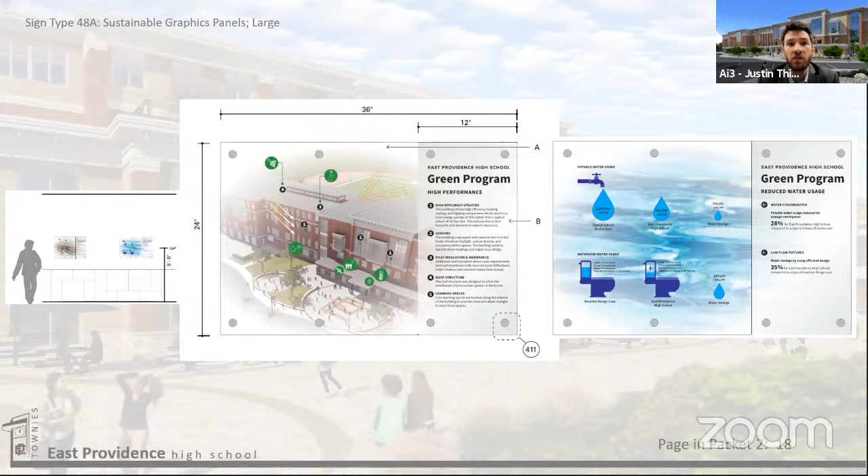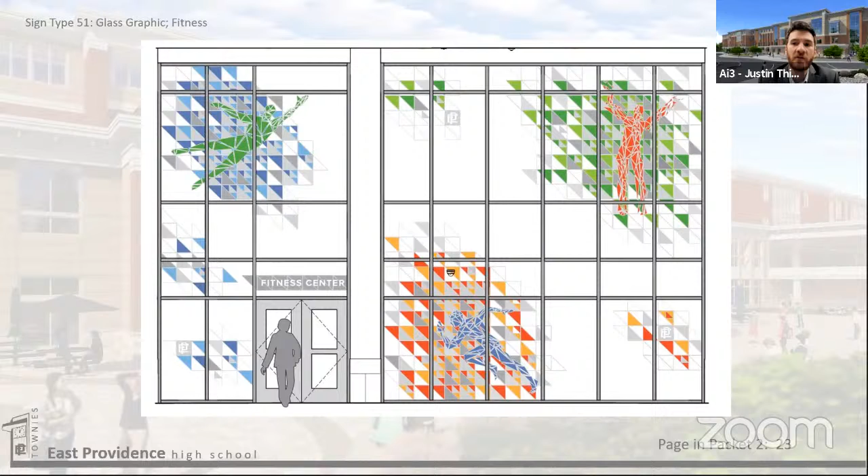Moving along, a couple additional chip signs showing the green performance of the building and water usage information, located right outside the main toilet core for the athletic wing, so visitors can see how sustainable the building is. This is the athletic center glass, again using triangles to invoke motion, color, and pattern. This is on the glass and is visible from both the corridor side and the fitness center side, so you'll see a mirror image of this from inside the space.

I volunteered so they could use my body shape. That's what you've been doing in this downtime? Yeah. They're looking for digital files soon, so we'll get a hold of you, Gene. Okay.

Within the space we have some inspirational quotes around the upper part of the room. Since they'll be throwing weights around, we didn't want anything low for durability purposes, so these are all placed higher up—inspirational quotes to liven it up with some color.

Moving forward to specific programs within the building—this one is for automotive technology. The left side of the door shows the history of the transportation industry, and the right side shows the future, whether self-driving cars, electric cars, or other possibilities, even referencing what's beyond, since nobody really knows at this point. So it's sort of where it's been and where it's going.

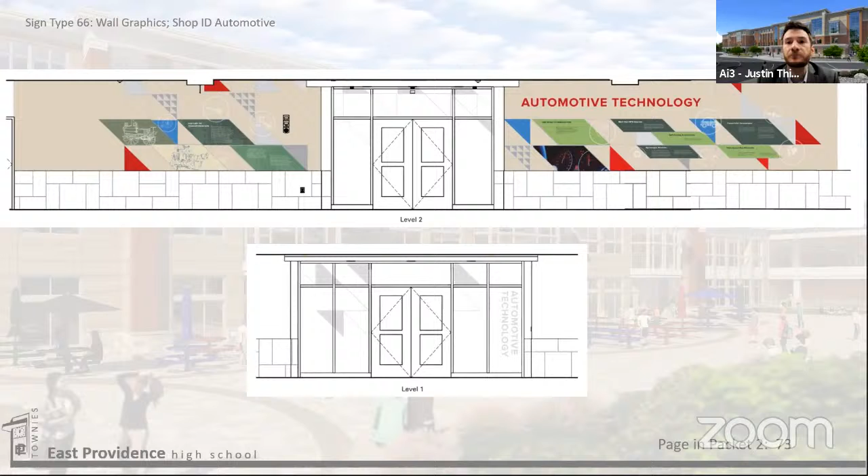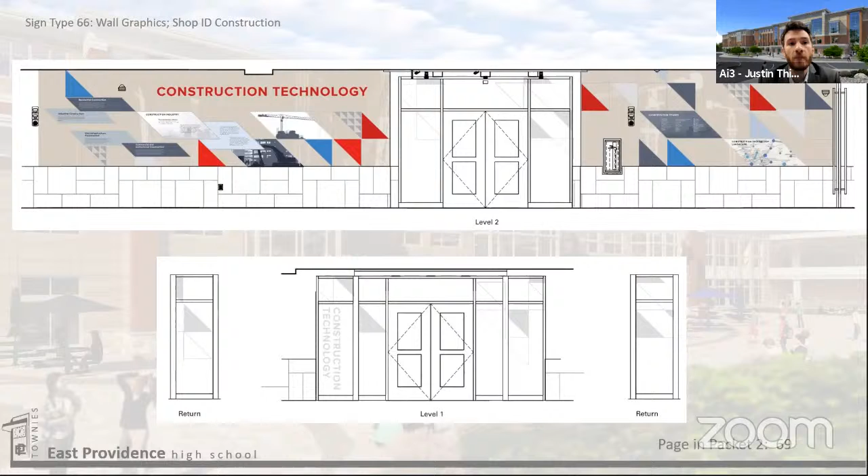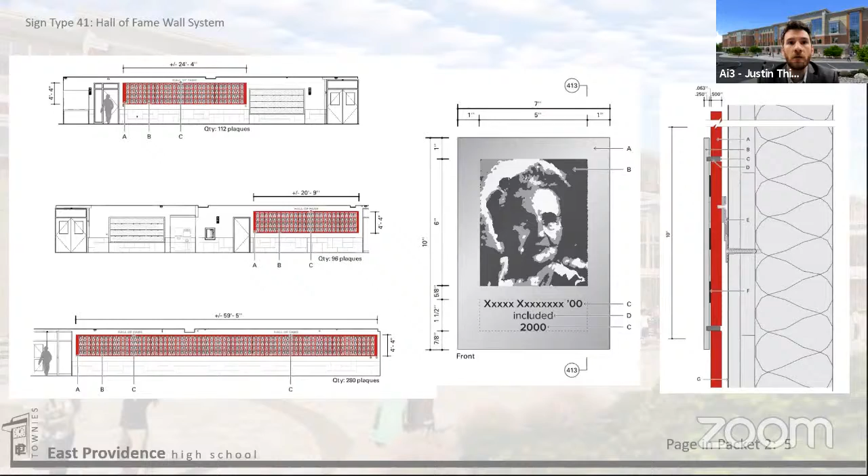And that's how it looks along the auditorium and performing arts corridor. The door on the left is choral. The door on the right, the first one down, just past that brown trophy case, is the band classroom.

Moving to the opposite side of the hall from those Hall of Fames, this is the last signage type we'll look at. This is outside the auditorium, which is a unique element of the building. Obviously, we can't have windows looking from the corridor into the space, for light and sound reasons, but we really wanted to show people things that can occur within it.

Following the triangle unifying element of the building, we came up with three images, almost like when the curtain is pulled back and you're standing on stage looking out to the crowd—whether it's a performance, a theater group, a solo group, anything along those lines. We chose three images to emphasize and support what goes on within that space.

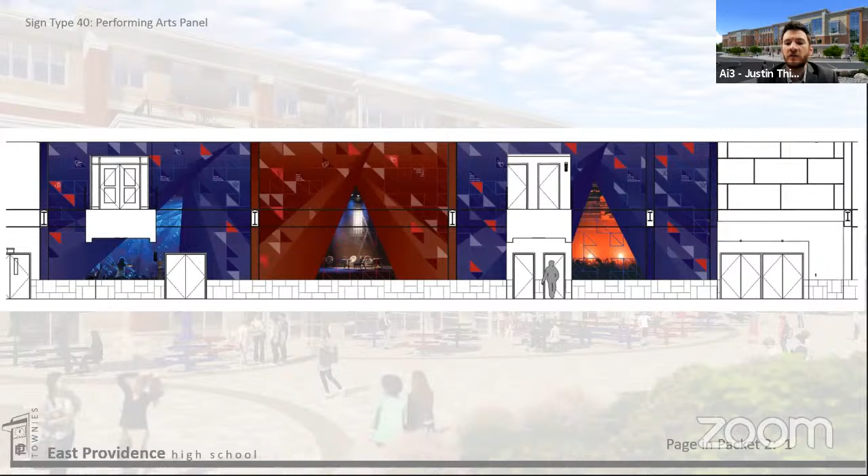As I mentioned, it's a two-story graphic. You can see it from the upper balcony as well as the lower corridor lobby area. There are smaller images of typical elements you'd see in performing arts and theater, as well as additional text scattered throughout to further support the visual and performing arts.

So I believe that is it for tonight. If there are any questions on any of this—I know we jumped around and answered a bunch—but if there are more, I can definitely address them now.

So a couple of things, one tangentially related. Our signage is all in English, right? I don't think that's inappropriate for a high school setting. All of our signage right now is in English, except maybe for the foreign language classrooms. Certainly I think there's an expectation that most of our student body are going to be proficient English speakers, especially when they graduate from high school.

That said, I think we envision more community involvement and visits to this building than we currently have, especially in the auditorium and gymnasium spaces. I wonder if there's an opportunity for us to do something like a phone app—like a 'You Are Here' app where you can swap out the languages, so whatever you're telling people via the various screens and signs, you could tell them the same way on their phone, maybe in Portuguese or Spanish, just for example. That's kind of a pie in the sky thing.